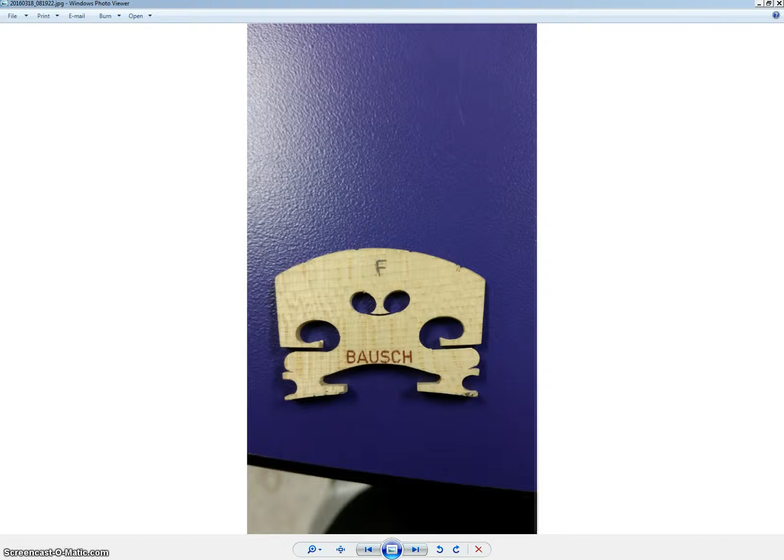Okay, this next part that was requested, I give some ideas on how you might start this. It came from Bryan. It's a violin part, and this is interesting because these aren't square shapes. Overall it looks like it might be somewhat of a challenge. So let's see what I can do here.

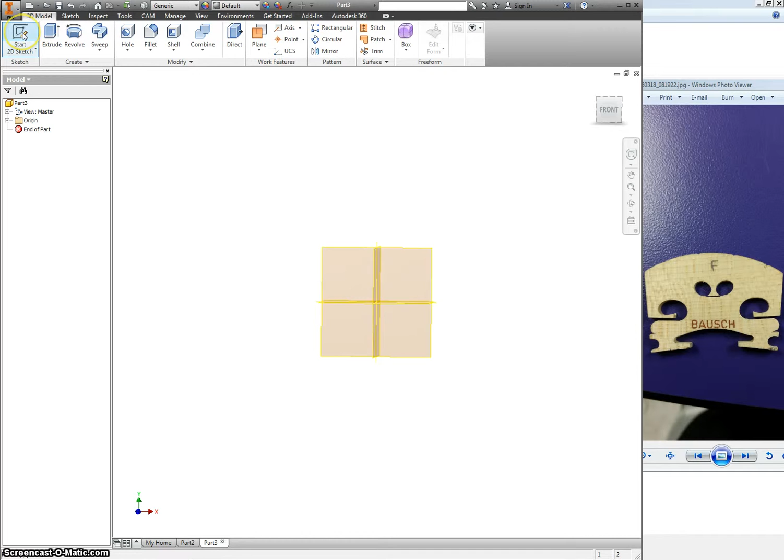Alright, just going to put that here so I can have a reference while I'm modeling this. I'm going to start a new sketch, and even though nothing is square, I think I'd still start with what is the tallest it can be, what is the widest it can be, and make a box for that. Then I'd go back and make this whole box a construction line, because I'm not actually going to use that for any of the modeling. I'm just using it for knowing where my limits are.

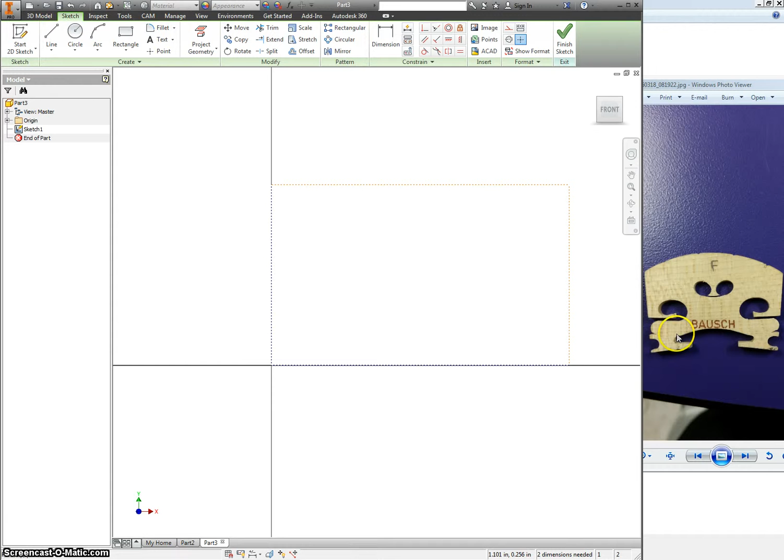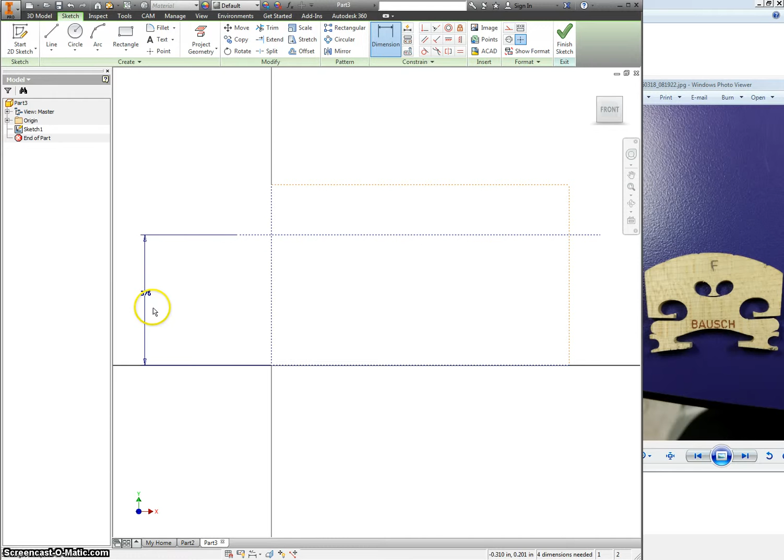Next step is I want to see where this corner is. So I'd measure from the base, if you set it up on the table, and measure the distance up through with a dial caliper up to that line. That should be at some set height. Again, as with the last video, I do not have this part in front of me, so I don't have exact dimensions. Ignore what these numbers are, but just know that when measuring, you can set these up as construction lines and go from that point.

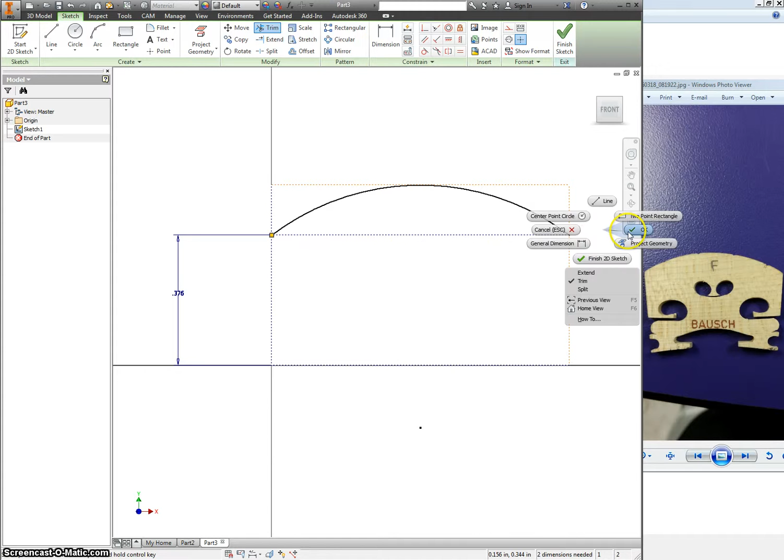Alright, I know I want a 3-point arc, so I make a point. Ooh, it doesn't like construction lines apparently. I'm making a 3-point arc, and I want to constrain it to these two intersections. Maybe the intersections are what's throwing it off, since they're construction lines. I'm going to try and click on my two ends there. Okay, looks like that was constrained correctly, and that one is as well. Perfect, so I'm using those two endpoints to snap this arc to those.

I also want to see how far in this would be. A good way to do that, if you can almost see here, if I stood this up on edge and put it up against a flat surface, I want to measure the distance from this flat surface to where this is with my caliper. So how far is that away? Whatever that distance might be, let's turn that into a construction line. We'll do the same thing on each side.

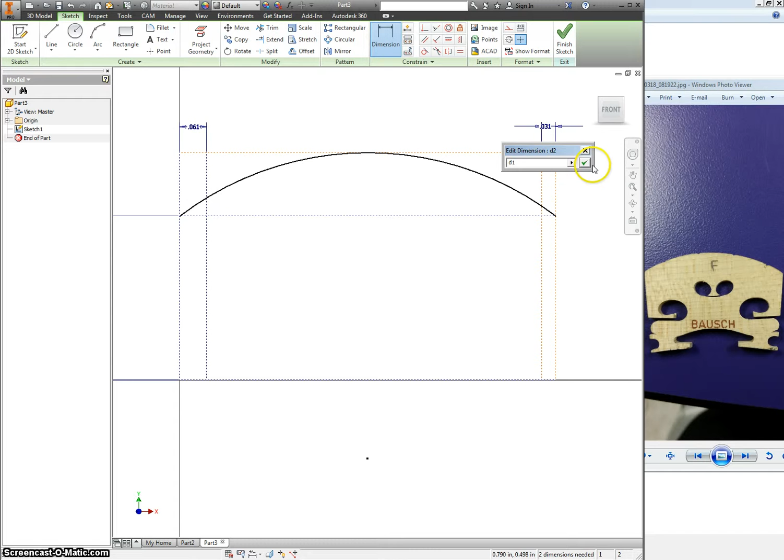Okay, so those are both now construction lines. I'm going to trim because I had issues when I didn't trim before. Go to dimension, we'll put in one side first. Let's assume that's correct. When I go to put in the other side, I can just click on this as a reference, and now these two will be linked. So if I change this to 0.05, they'll both change to 0.05.

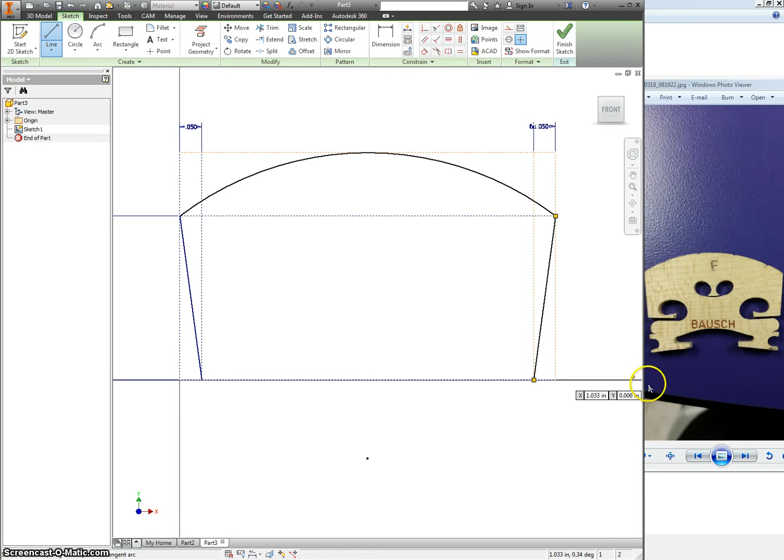Okay, so let's say that was correct. I then grab my line tool, go from this point down to that intersection on either side. You want to measure, and here again, maybe I can show it. No, maybe not. Nope, never mind. Imagine, ooh, I have two of them. This does help.

Imagine if you put something underneath this. Okay, so this is on a flat surface. I measure from this line up to this point. Actually it doesn't look like it's very much, so I'm going to make it small on this drawing. Again, this is something you'd be measuring with your calipers, marking the distance away, using this line now as a reference on how far up and over this should go.

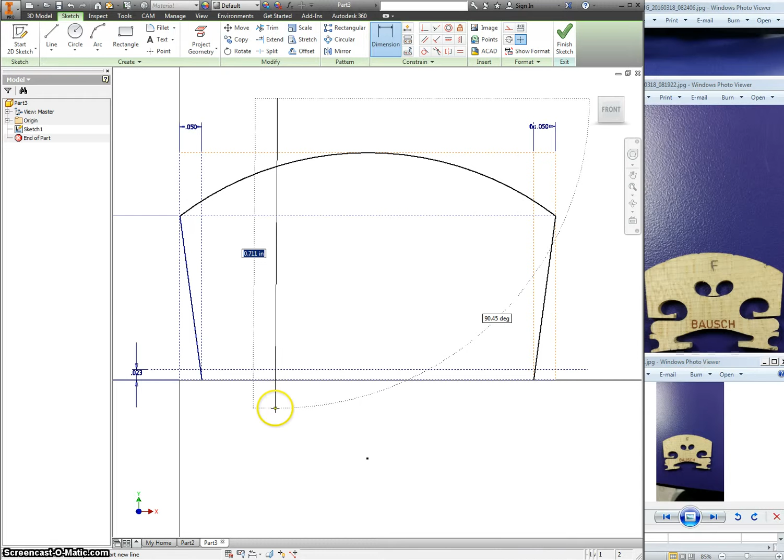You should also be able to measure from this edge to here. Again, if you had a flat surface, you could use that as a step distance. So let's assume again that you can find that. Do that on either side, just so we have a vertical line. The distance between there looks like it goes in quite a bit. We'll make this go in 0.05 inch.

Again, I don't have the actual part, don't use my same dimensions. Just look at what I'm doing, the method I'm using for this. Okay, after we know this, we can go back with our line tool, connect that intersection up to this one. The same thing on the other side. Doesn't look like that goes straight up.

There's some kind of little circle over here somewhere. This is the kind of thing where if you can measure the distance between there, that'd give you a diameter. If you measure the distance between this face, I don't know if there's really something nice over here you can measure to. If you use step distance again, you can measure from this wall to where this is. So a lot of what you're going to be doing is just finding references on where you can put things. I don't even know if that circle made it on the line. Yeah, it looks like it did.

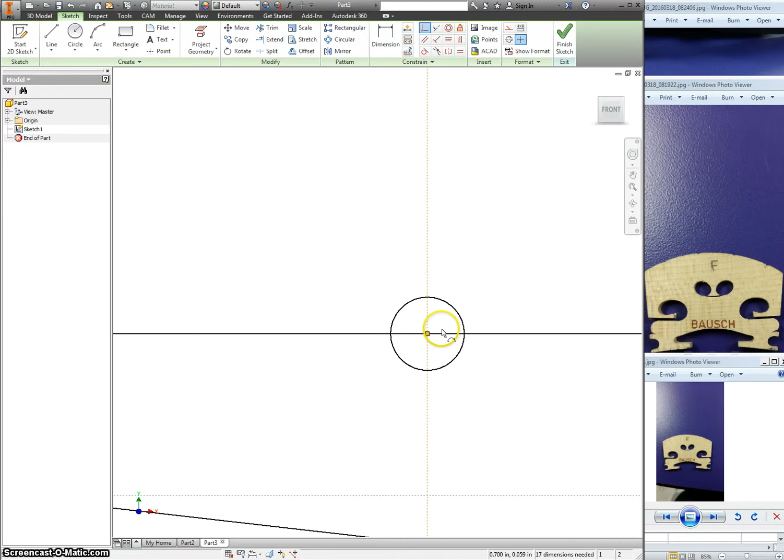Uh-oh. Here it did not. So here I want my circle to pass through this line. I can say coincident with the center point in this line, and now it drops down to it. Can make this into a construction line.

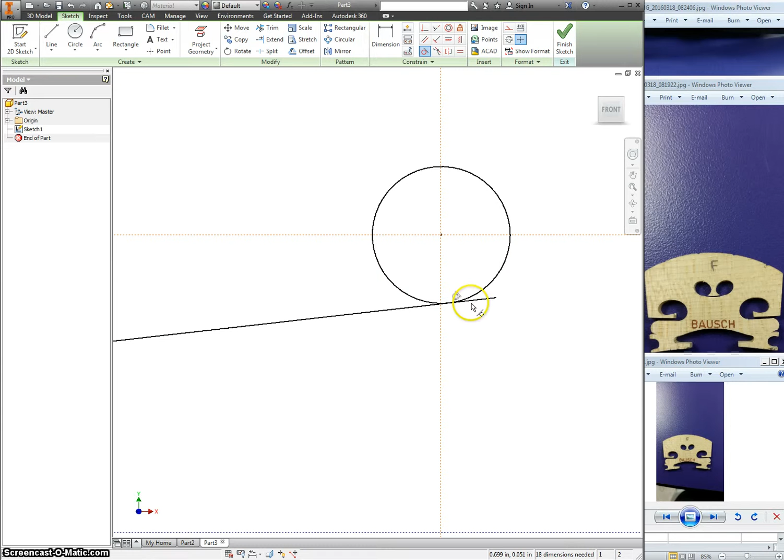Now I can start to draw another line that has to be tangent with this circle. Ideally, it would tell me when it's tangent. If it doesn't, don't sweat it. Just make it go out a little bit further. Make the two tangent, then trim off the extra.

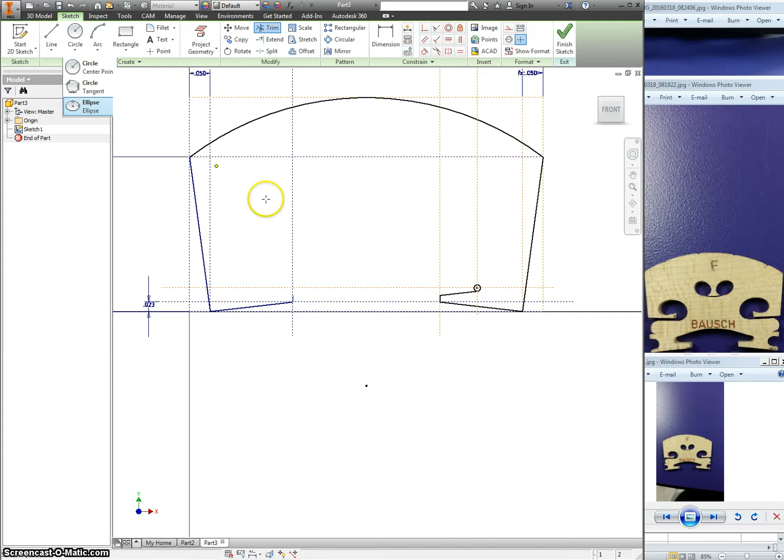Okay, so there's that little rounded part, like what you see here. If you don't use mirror, you'll end up drawing a lot of things on both sides so it ends up symmetrical. These, to me, kind of look like an ellipse. So you'd have to know with an ellipse, anytime you draw one, is the distance out and the distance up.

So, assuming we knew these, and had an idea of where this was, it also looks like it's rotated. So I should be able to say rotate this shape, center point is there. And it's at a little bit of an angle. You can type in here where it says angle exactly what that would be, if it's a 30 or 20 or 15.

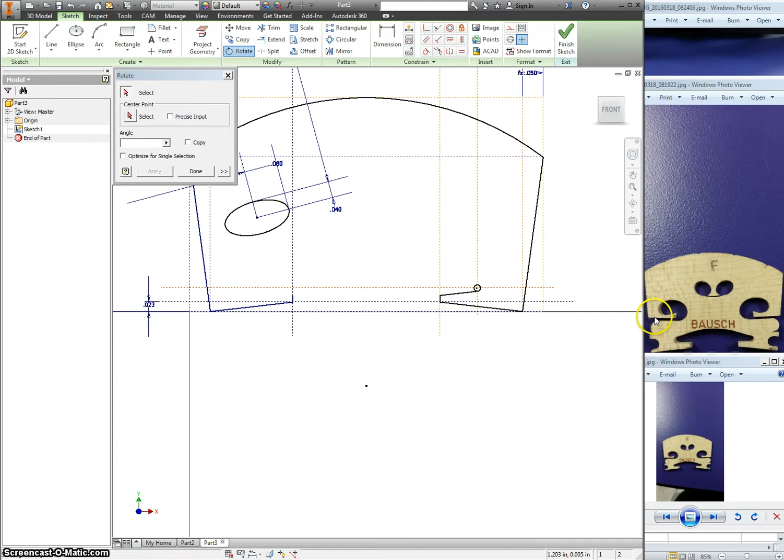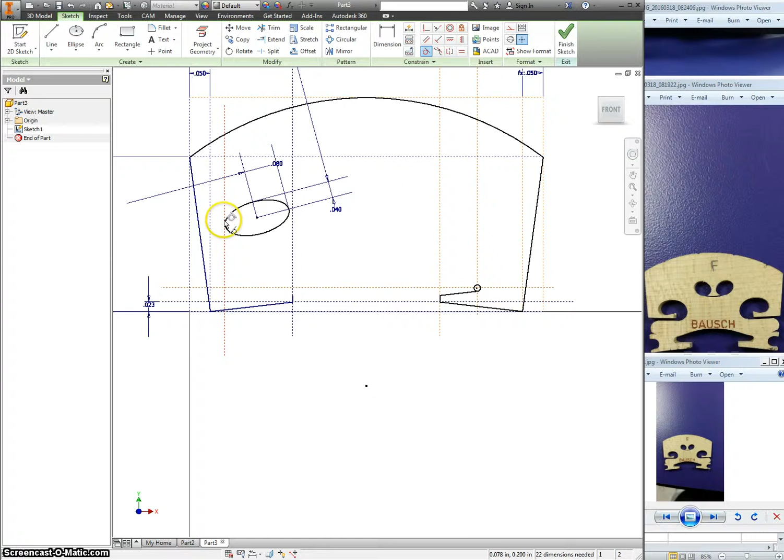Okay, and with this, it might be hard to say where the center is, but you can figure out. This is something I do a lot. If we draw a line, make this into a construction line, have this be tangent to the line, so now it has to touch at just the one point, and now you can measure how far this is from this line.

Okay, so instead of 0.085, maybe I want it to be 0.1. And nudge it over. I can do the same kind of thing, measuring from the bottom up or from the top down to make another line that's tangent.

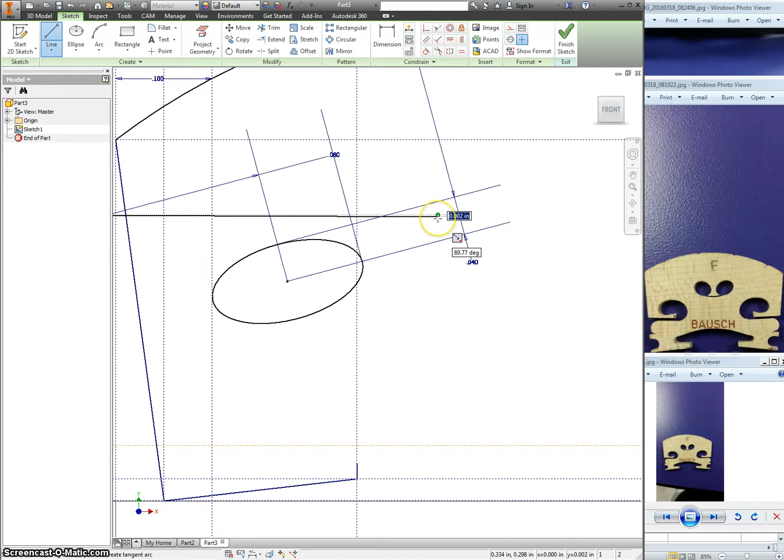And that doesn't look horizontal to me, so I'm going to make sure with my horizontal constraint that it's straight. Tangent that line to that ellipse, and then I can set how far up it is.

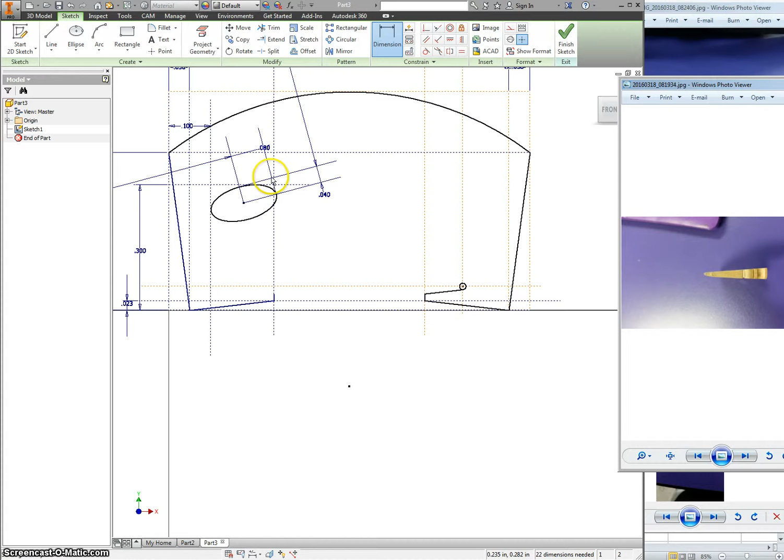Quickly, I was also sent this picture. Looks like, aside from it being a funny shape this way, it's also at a wedge kind of an angle. So let's assume that I can make this basic shape. Basic, right?

Here's another tool that sometimes works, sometimes it gives issues. We can mirror different parts. Let's say I want to mirror these two features across this line. That worked.

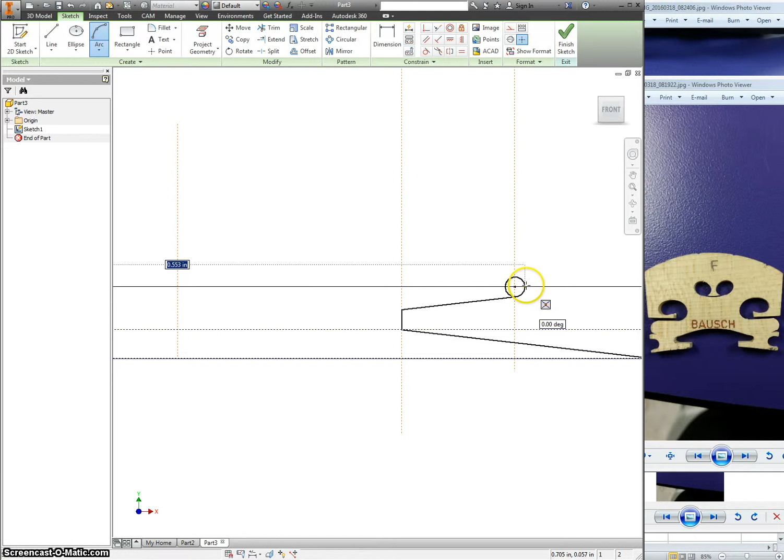I want to make an arc. Oh, I don't want it to snap to that. Let me try that one more time. I want my arc to be tangent to these.

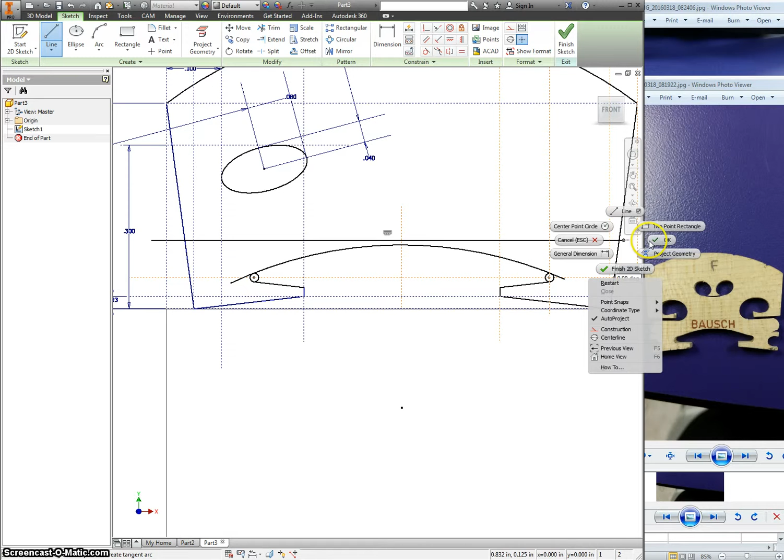This is another one where if you knew how high up it was going to go, you could set a construction line, make it tangent to that line. I'll go ahead and draw that in here, that way you have an idea of what I'm doing. I think by this point you've kind of figured out what my method is. If not, you should have been paying closer attention.

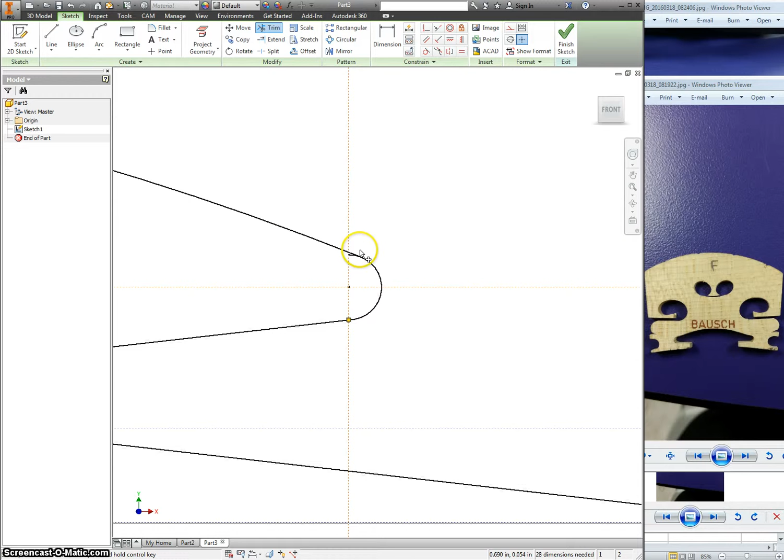Trim the pieces you're not going to use. See if there's a little trace of that on the other side. Nope, okay.

And something I want to check with this is that the center point from this arc matches up with the center point of the rest of the thing. And the same should be true of that.

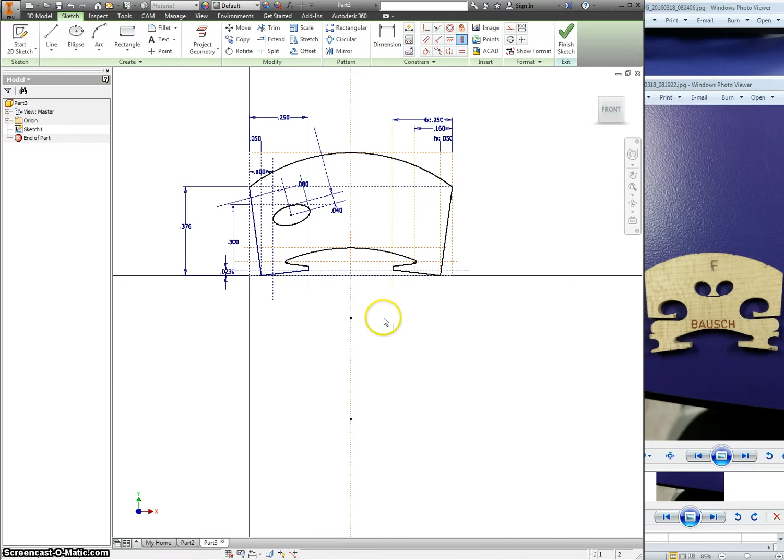Okay, so let's say I can go ahead and finish this and extrude it out. I want this to be a little bit thicker, not 1 inch thick, but let's say I want 0.25. Even that seems big. Okay, I want to make it the thickest part possible.

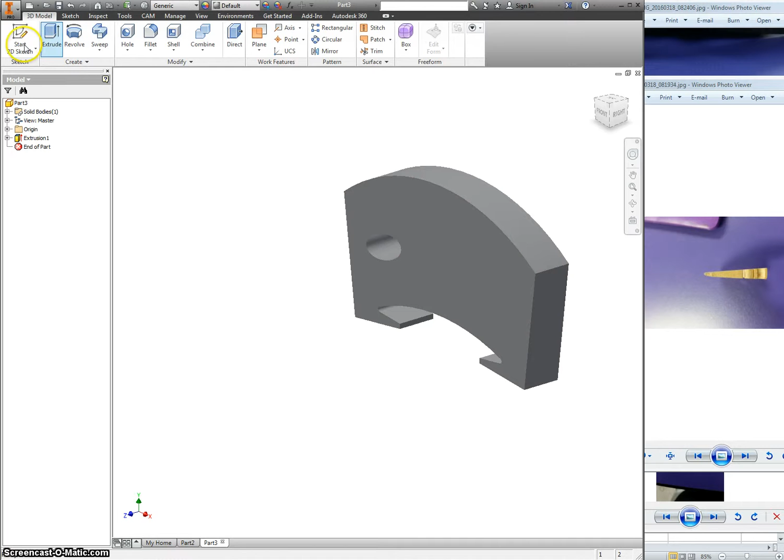Go in to start a 2D sketch. I'm going to make the sketch on one of these origin planes, like my YZ plane. And from here, looks like that's a 90-degree angle, and this is the part that's tapered. So I want to figure out what this small part is. I'd end up making a line.

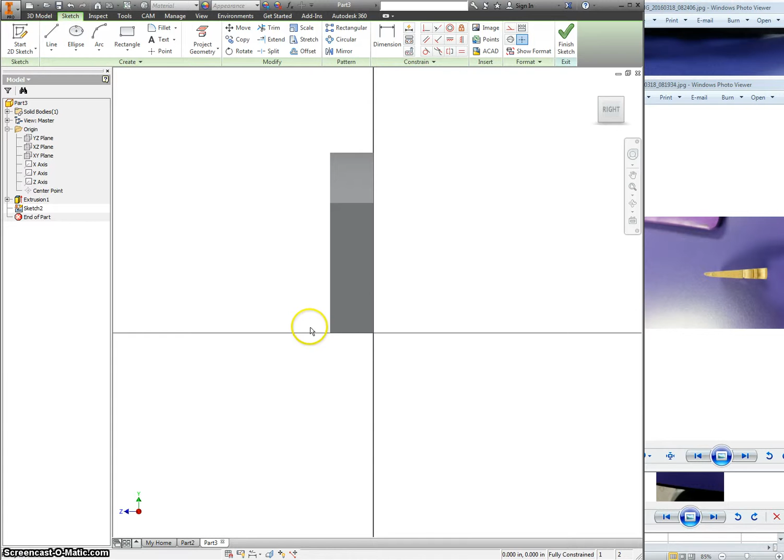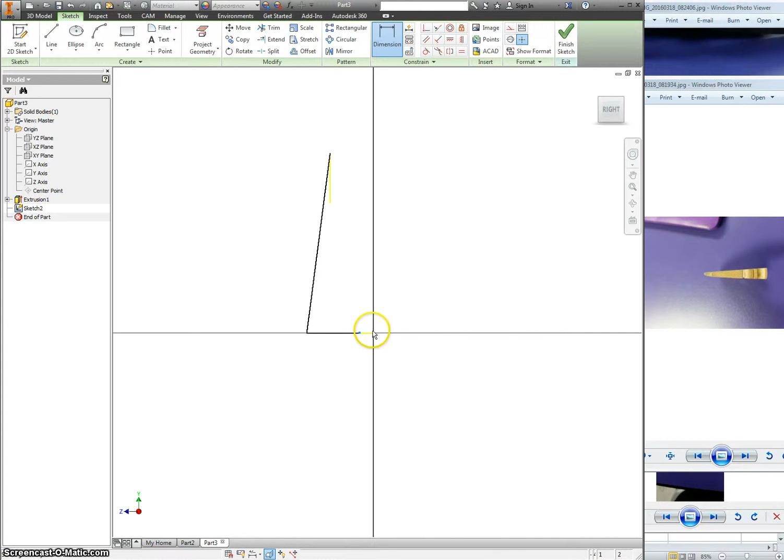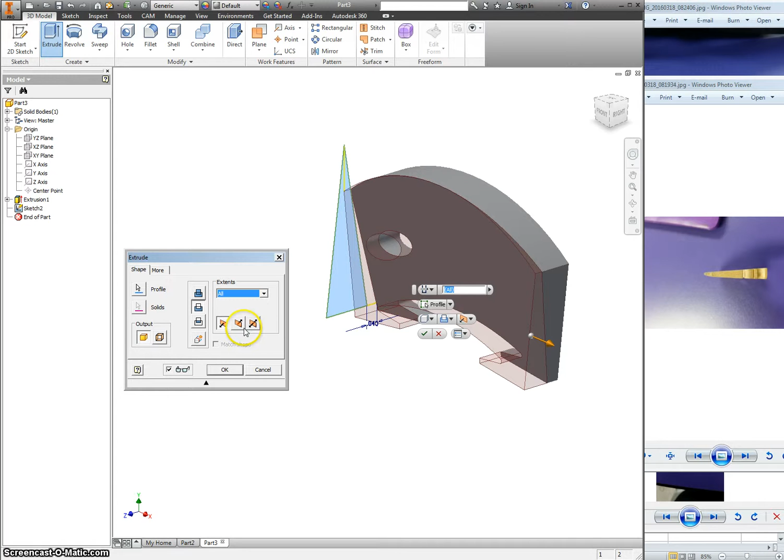Right click, you can hit F7 and see what the inside of this whole thing looks like, which apparently is not very good. But if I know how small this part is, and I already set this top part to be the correct distance, then when I go to connect my two lines here, I can do an extrude cut to remove material, change my distance to all. Now it's cutting all the way across.